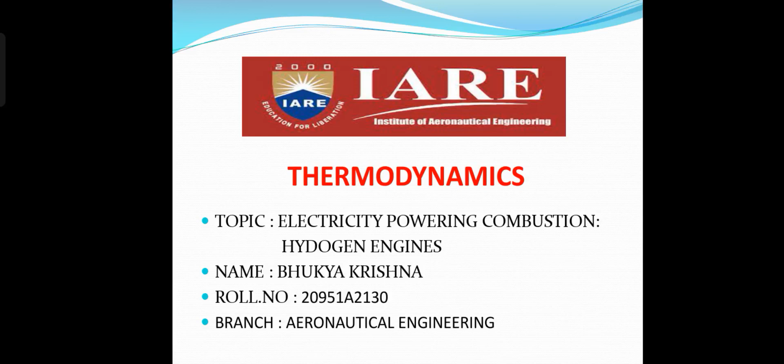So, today my topic is electricity powering combustion hydrogen engines. Hydrogen is a means to chemically store energy. It can be used to buffer energy in a society increasingly relying on renewable but intermittent energy, or as an energy vector for sustainable transportation. It is also attractive for its potential to power vehicles with near zero tailpipe emissions.

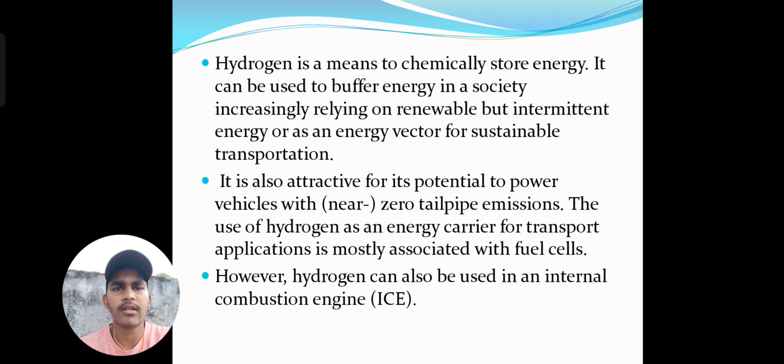The use of hydrogen as an energy carrier for transport applications is mostly associated with fuel cells. However, hydrogen can also be used in an internal combustion engine (ICE). When converted to or designed for hydrogen operation, an ICE can attain high power output, high efficiency, and ultra low emissions. Also, because of the possibility of bi-fuel operation, the hydrogen engine can act as an accelerator for building up

a hydrogen infrastructure. The properties of hydrogen are quite different from the presently used hydrocarbon fuels, which is reflected in the design and operation of a hydrogen fueled ICE. These characteristics also result in more flexibility in engine control strategies and more routes for engine optimization. This describes the most characteristic features of H2 ICE, the current state of H2 ICE research and demonstration, and the future prospects.

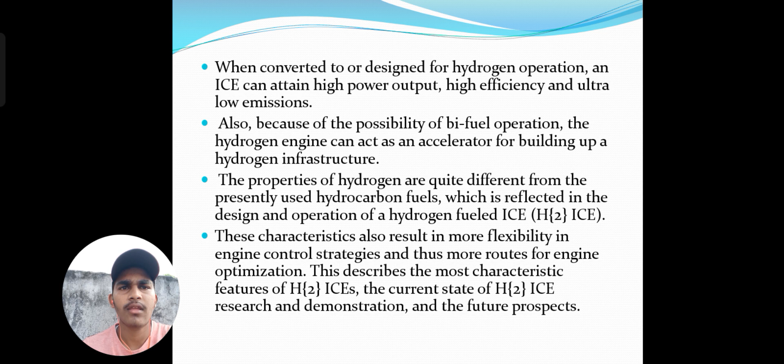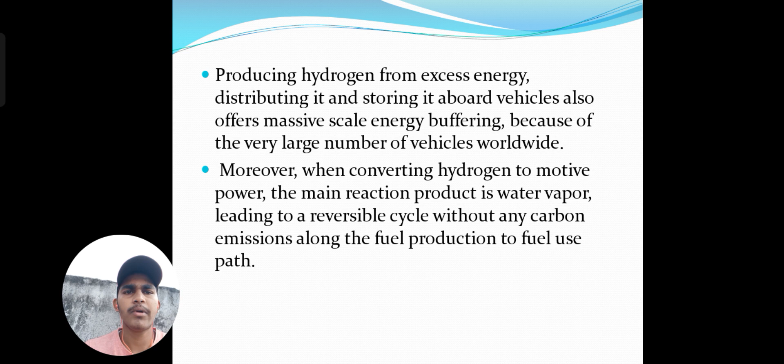Producing hydrogen from excess energy, distributing it and storing it aboard vehicles also offers massive scale energy buffering because of the very large number of vehicles worldwide. Moreover, when converting hydrogen to motive power, the main reaction product is water vapor, leading to a reversible cycle without any carbon emissions along the fuel production to fuel use path.

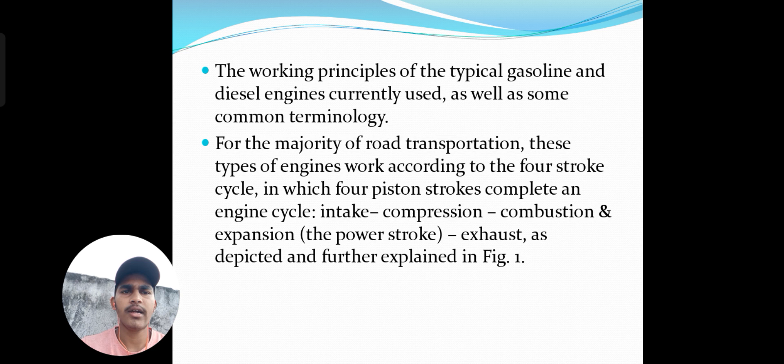The working principles of the typical gasoline and diesel engines currently used, as well as some common terminology. For the majority of road transportation, these types of engines work according to the four stroke cycle, in which four piston strokes complete an engine cycle: intake, compression, combustion and expansion (the power stroke), and exhaust, as depicted and further explained in Fig. So intake stroke, compression stroke, power stroke, and exhaust stroke.

Thermodynamic analysis suggests that the theoretical cycle efficiency, the ratio of the engine work output to fuel chemical energy input, increases with compression ratio. Another important factor influencing the theoretical obtainable efficiency is the working fluid. The properties thereof depend on its constituents, air, fuel, and residuals from combustion, depending on the engine type.

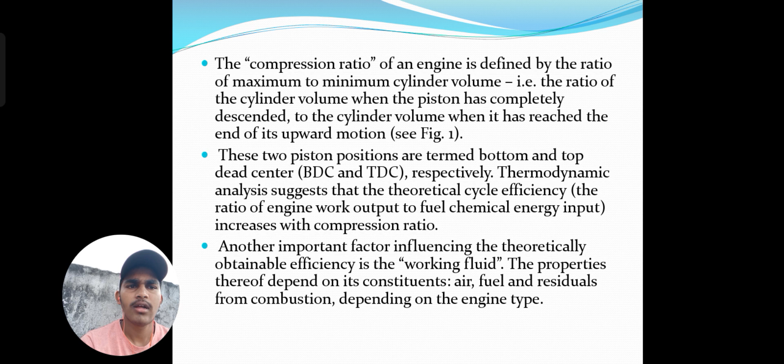When the amount of air that is admitted to the engine is just enough to fully burn the injected fuel, the engine operation is termed stoichiometric. The actual fuel to air ratio divided by the stoichiometric fuel to air ratio is called the fuel/air equivalence ratio, phi. Thus, phi equal to 1 denotes stoichiometric operation. If phi is less than 1, more air is aspirated by the engine than is necessary for complete combustion. This is termed lean operation. The reverse, phi greater than 1, is termed rich operation.

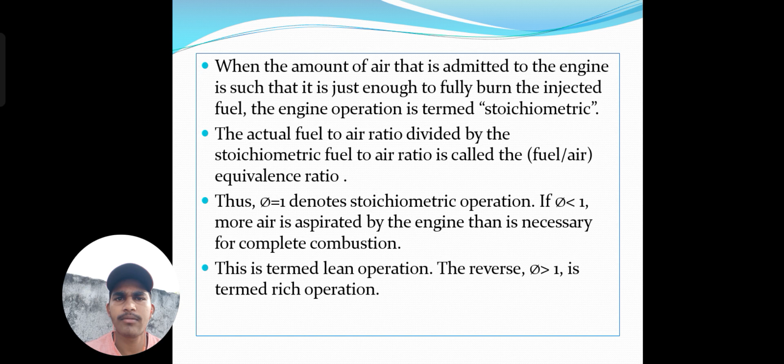Diesel engine basics. In a diesel engine, only air is drawn into the cylinders during the intake stroke. Towards the end of compression, diesel fuel is injected directly in the combustion chamber, which will auto-ignite due to the high temperature of the compressed air.

Here, the combustion progress depends on the rate of injection, the rate of evaporation of the injected fuel, and the rate of mixing of the fuel vapor with the air to form a locally combustible mixture. The short time available for fuel-air mixing necessitates excess air, that is, phi is less than 1.

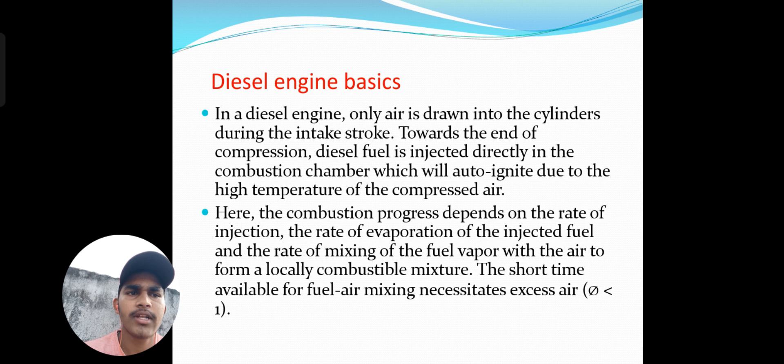The power output is now controlled by the amount of fuel that is injected, as opposed to the amount of fuel-air mixture for a gasoline engine, which is termed qualitative control. Thus, part load efficiency is much better than for a gasoline engine, as reducing the power output does not rely on increasing the intake flow resistance with a throttle valve.

Peak efficiency is also higher because of the higher compression ratio of diesel engines, actually needed to obtain sufficiently high compression temperatures to allow auto-ignition, as well as the overall lean combustion with which a diesel engine is operated, leading to better thermodynamic properties of the working mixture.

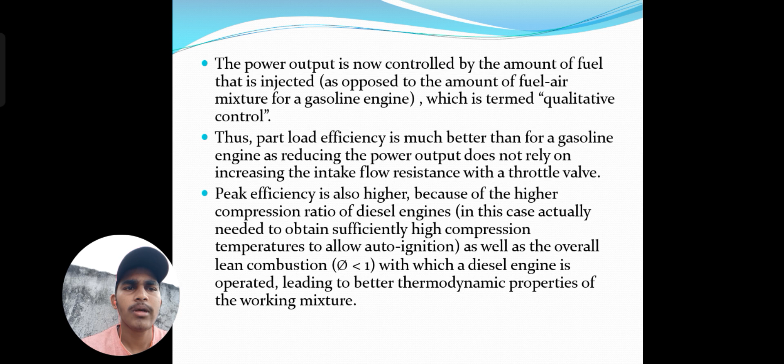Automotive diesel engines are now almost exclusively equipped with a turbocharging system. This consists of a turbine wheel in the exhaust manifold, which is powered by the energy still contained in the exhaust gases, itself driving a compressor wheel in the intake. Thus, the intake air is compressed, leading to a higher specific power output of the engine as more fuel can then be injected per cycle.

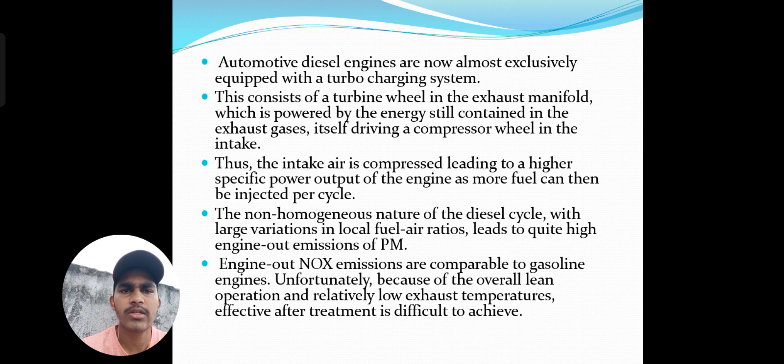The non-homogeneous nature of the diesel cycle, with large variations in local fuel-air ratios, leads to quite high engine-out emissions of PM. Engine-out NOx emissions are comparable to gasoline engines. Unfortunately, because of the overall lean operation and relatively low exhaust temperatures, effective aftertreatment is difficult to achieve.

The overall lean operation leads to exhaust gases containing oxygen, which makes it difficult to reduce the NOx to N2. The relatively low exhaust temperatures lead to low catalyst activity, thus tailpipe emissions are generally higher than for gasoline engines.

Due to the better part load efficiency, the CO2 emissions are around 20% lower, and the fuel economy is typically 25 to 30% better than for gasoline engines. For diesel engines, a peak efficiency of 44% is currently the state of the art, with 36% achieved for gasoline engines. The specific power output of diesel engines is increased by turbocharging and reaches a level up to 75 kilowatts per liter engine displacement.

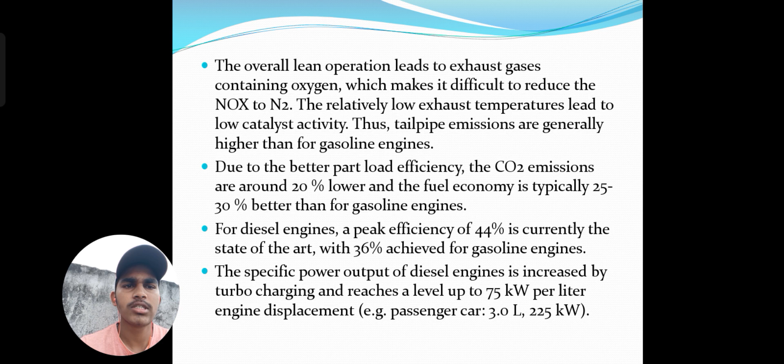There are three main reasons for a hydrogen economy to be so desirable. Consider that a reversible cycle can be established, with hydrogen made from water and turning back into water when used. A variety of sources can be used to make hydrogen, and the conversion of the hydrogen into other forms of energy results in zero emissions.

Further advantages for the case of hydrogen powering an internal combustion engine include combustion engines being an extremely mature technology and their producibility from recyclable materials, which both reduce cost. In addition, the internal combustion engine route opens up a multi-fuel option where hydrogen is used when available and another fuel is used when it is not.

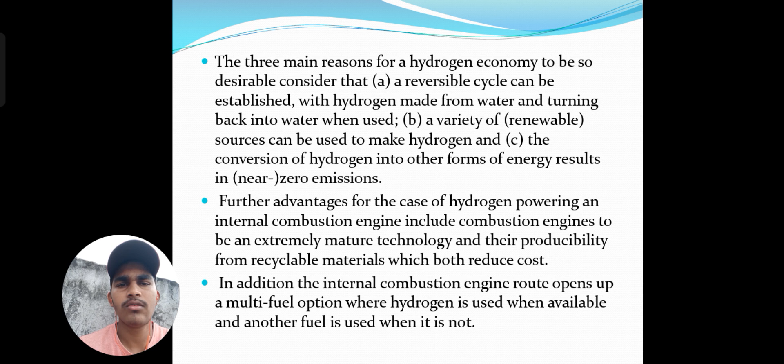The unique properties of hydrogen create certain challenges such as combustion anomalies, but also open up the potential to increase the power output by more than 15% compared to conventional gasoline engines. Further, the wide flammability limits and the high flame speeds even under lean conditions enable the use of highly efficient lean burn engine load control strategies.